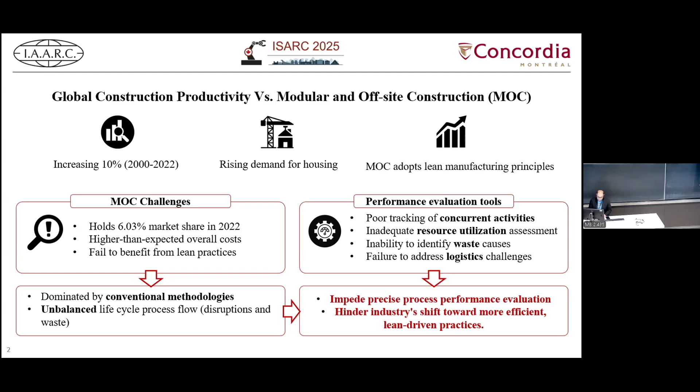Many stakeholders reported higher than expected costs compared to conventional methods, often failing to fully benefit from lean practices. Processes are still dominated by conventional construction methodologies. Its unique processes and parameters are still neglected, which results in unbalanced life cycle process flows, which are engaged with disruptions and waste. Also, current performance evaluation tools fail to effectively assess MOC process performance due to their poor tracking of concurrent activities, inadequate resource utilization assessment, inability to identify waste causes, and failure to address logistic challenges. These gaps impede precise process performance evaluation and hinder the industry's shift towards more efficient and lean-driven practices.

To identify research gaps, conventional KPIs in general and lean manufacturing, road transportation and on-site construction KPIs with respect to productivity and process flow were investigated. Also, productivity evaluation models in MOC with respect to the three components of project tracking and control, such as progress measurement, performance assessment, and forecasting were investigated. However, MOC studies relied on conventional construction KPIs, and the process flows and sequencing unique to MOC are still not regarded. These studies focused mostly on the manufacturing phase, not the life cycle.

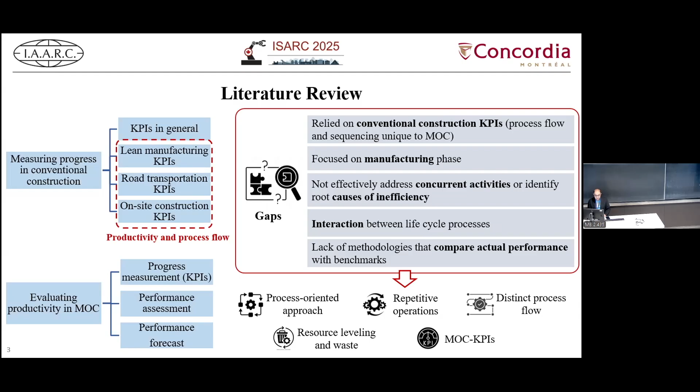They did not effectively address the concurrent activities, nor were they able to identify the root causes of inefficiency. The interaction among the processes and between life cycle processes is not regarded, and there's still a lack of methodologies that compare actual performance with the predefined benchmark. So given the differences between off-site and on-site construction methods, modular construction should be treated as a process-oriented approach that supports repetitive operation and its distinct process flow, incorporates resource leveling to identify waste, and includes MOC-specific KPIs to assess lifecycle performance. In this respect, this research introduces a process-oriented approach to systematically evaluate lifecycle productivity using proposed MOC-specific KPIs.

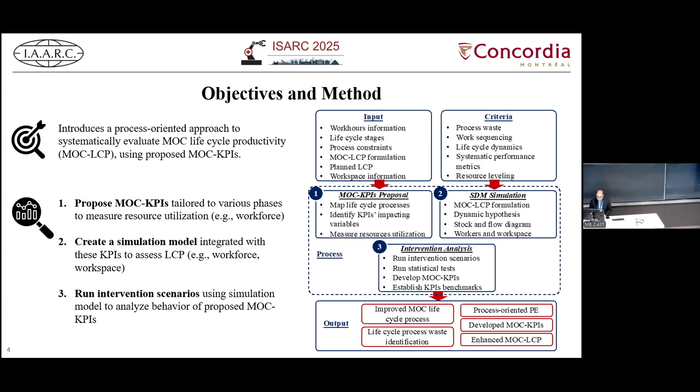The objective is achieved by proposing KPIs tailored to various lifecycle phases to measure resource utilization in terms of workforce, creating a simulation model integrated with these KPIs to assess lifecycle productivity while considering resource allocation in terms of workforce and workspace. And finally, running intervention scenarios using the simulation model to analyze the effectiveness of the proposed KPIs in identifying root causes of waste and lifecycle process enhancements.

To propose KPIs aligned with the lifecycle processes, the process flow of one single module was mapped using the sequence diagram and insights from literature review, modular building industry reports and interviews with industry experts, such as Stack Modular and Smart Modular Canada from Canada and MODLOGIQ from Pennsylvania, US. The proposed KPIs attempt to identify various sources of waste with respect to resource utilization. For instance, within the manufacturing stage, the module defect modification attempts to measure the amount of time spent to repair defective modules across the production line.

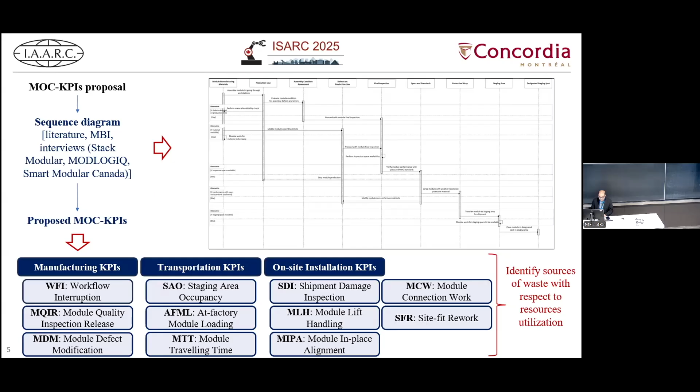Before developing a simulation model, the lifecycle productivity equation is formulated, which is surface area of modules installed on site per total project work hours. In this respect, a system dynamics simulation model is used, which is able to integrate management actions, performance evaluation, and process performance improvement. Furthermore, the system dynamics model can examine the effects of intervention scenarios on lifecycle processes. It is capable of modeling continuous processes and cumulative effects, such as lifecycle productivity. And also, it can consider feedback loops and cause and effect relationships between lifecycle parameters. So this means how changes in one aspect of the process can ripple throughout the entire life cycle.

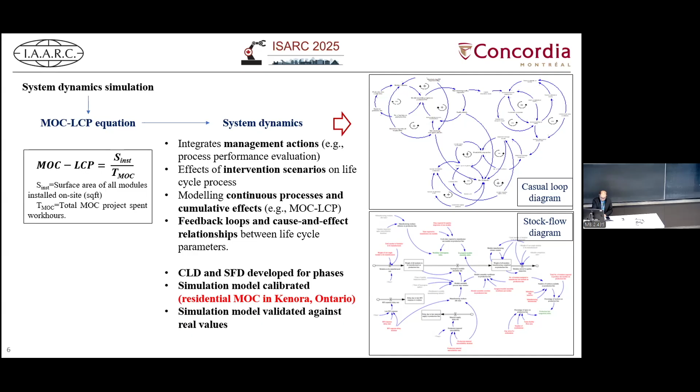In this respect, causal loop diagrams and stock flow diagrams were developed for all phases of the modular construction. The simulation model was calibrated with a residential modular project located in Kenora, Ontario, provided by Smart Modular Canada. Also, the simulation model was validated against the real values. Furthermore, the objective of the intervention analysis is examining the behavior of KPIs under each scenario. Each intervention was devised with the aim of improving lifecycle process performance. This involves several key steps: identify interventions and their boundaries, run each scenario using the developed and validated system dynamics model, and perform statistical tests and modeling techniques to assess which KPIs efficiently identify root causes of waste and contribute to lifecycle process improvement.

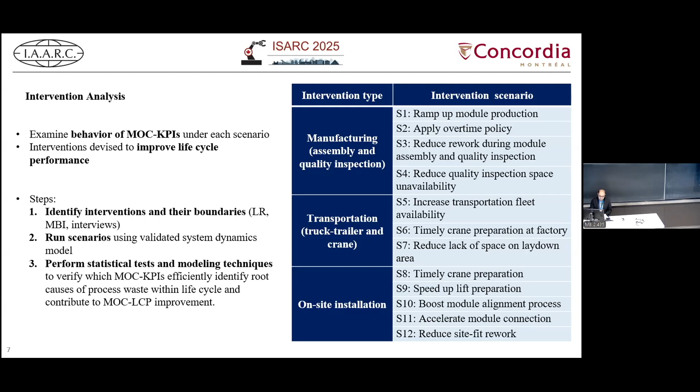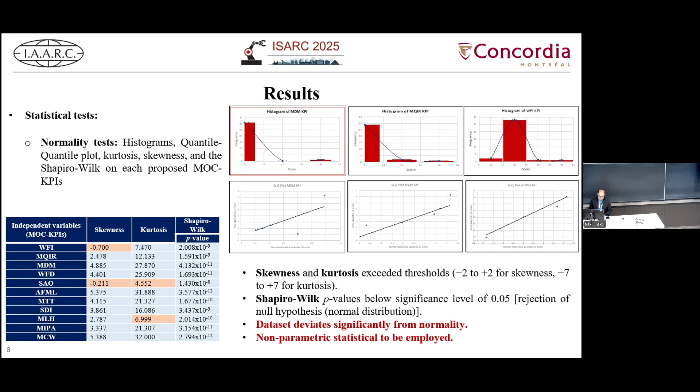Further, to examine the strength and direction of the relationship among the proposed KPIs, Spearman's rank correlation coefficient was applied. Since all the coefficients fall within the acceptable range, the proposed KPIs are deemed suitable for inclusion in the developed model. In this respect, to identify those that significantly contribute to lifecycle productivity improvement, quantile regression was applied. The analysis involves multiple iterative rounds during which the p-value for each KPI was computed. KPIs with p-values exceeding 0.05, signifying a lack of statistical significance, were systematically excluded from subsequent iterations. This process continued until all remaining KPIs demonstrated statistical significance. In analysis round 5, all the remaining KPIs remain significant.

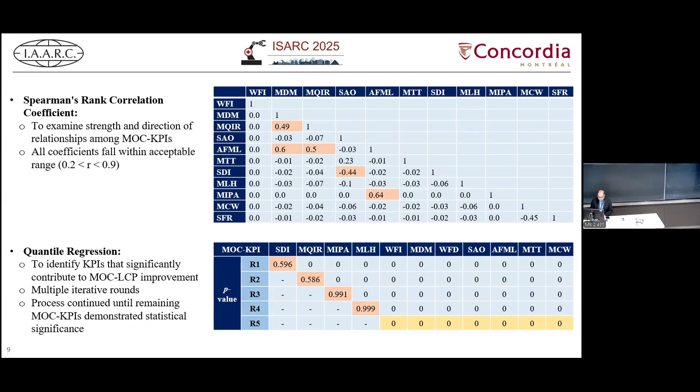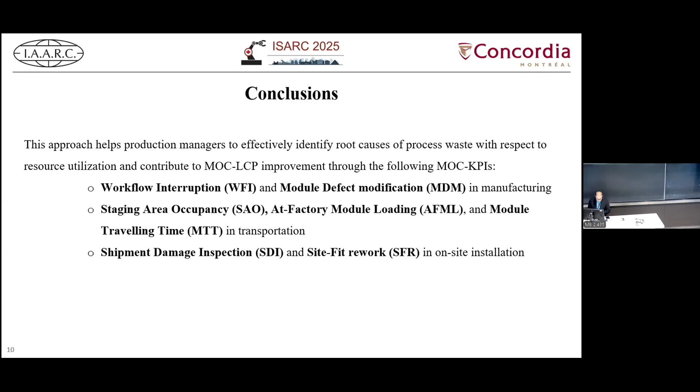So, in conclusion, this approach helps production managers to effectively identify root causes of process waste with respect to resource utilization and contribute to lifecycle process improvement using the following KPIs: workflow interruption and module defect modification KPIs within the manufacturing stage, staging area occupancy, at-factory module loading and module traveling time within the transportation stage, and shipment damage inspection and site fit rework within the on-site installation.